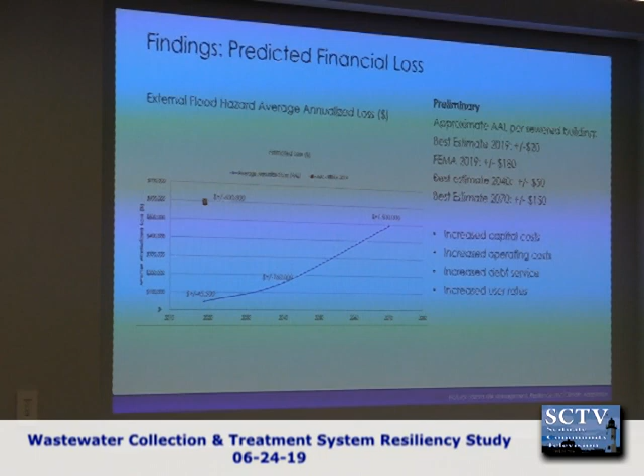And so I'm kind of starting with the last slide we ended with in the last presentation, which is trying to translate some of this into a financial loss. I talked about this quite a bit in the last presentation, so I don't want to do that again today. But we try and treat this in financial terms as much as we can. This doesn't have costs related to the effects of the infiltration, but does have costs related to the external flood vulnerabilities. So it just gives you kind of a metric, and those curves are going up.

The x-axis is time. And really what I want to say is there's uncertainty here, but we try, in our business, to predict these costs going forward. And then those costs ideally would get incorporated into how you look at your user fee, your rate structure, the town's general budget, the operating budget for the system.

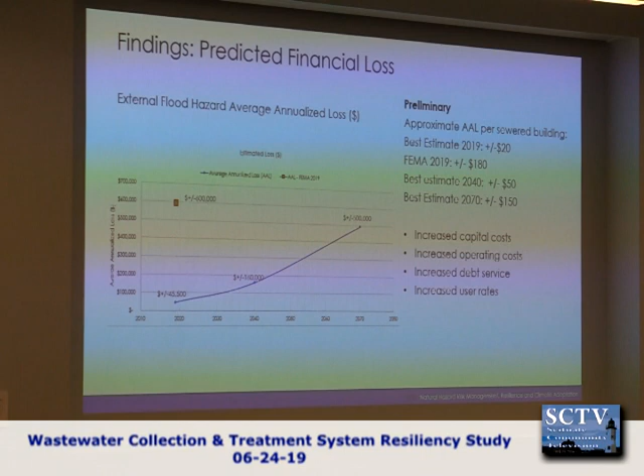So, when you think of costs for operating a wastewater system, maybe you have to replace some aging facility, you've got to buy chemicals, you've got labor costs, all of those. Well, these are additional costs to that. But they're very real costs. While they're not as well known, because we're predicting in the future, they're very real. We do know they will happen. They'll happen with fairly predictable average likelihood over time. So part of what we have to do is really try to get an understanding of that and integrate that into the overall finances of the town, but in particular the finances of the system.

So I'm going to go through these slides pretty quickly because they are a little bit detailed, but just kind of walk through the process. So once we did all that risk and hazard characterization, we looked at all the impacts of each of the pump stations and the impacts to the treatment plant, and we revisited the infiltration issue that was done by a company called CDM Smith. We start to set priorities, because we know doing nothing isn't really a reasonable priority. That's sort of the beginning of a diminished town, basically, is doing nothing.

So you really have to be somewhat proactive here, and so the first priority is dealing with 4 of these key drainage areas that are the primary sources of your infiltration and inflow. And we move down to looking at making some of the pump stations more flood resistant, hardening. We're doing the same with the treatment plant. And then we look at other options that we have in addition to that number 1, to kind of manage overflow. So, yeah, you may have a question.

Yeah, what does harden mean? Hardening could mean that if flood waters would rise to the point where they would get through the door and start impacting systems inside the pump station, we would put a watertight door. You would put a what? Like a watertight door. You wouldn't have to try to raise the station? Well, that is a form of hardening, but that is a very expensive form of hardening, because these pump stations are about $2 million a pop. So we are trying to be efficient in how to do that.

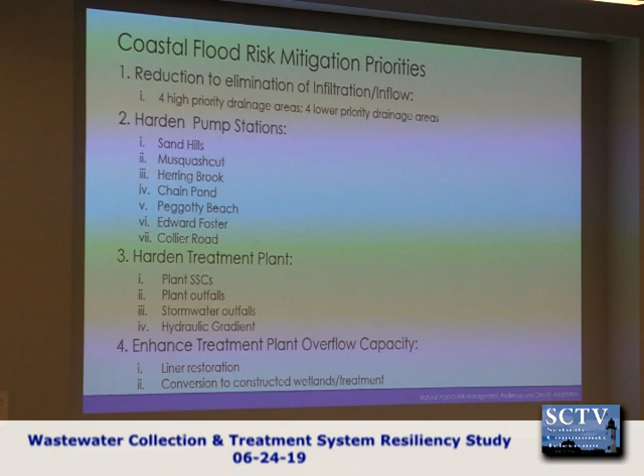So that's a good segue. Part of being efficient is to take a phased approach, because us presenting slides or even reports is completely pointless if it's not likely to be implemented. There are a lot of engineers who just throw numbers, but for this to be successful as a town, it has to be implemented. That's part of what we see as our job. So we realize you're not going to do it all at once, because that would just mean you would do nothing. So we take a phased approach, and actually I have the slides in front of me. I don't know if you can look at that.

So how do we look at phasing? Really the goal, it's basically near term and long term, and I'll talk about what that means in terms of years in a few minutes. But our immediate goal is to reduce the risk within a reasonable price point that can be done in a near term period, in a few years.

What does the abbreviation I/I mean? So that is infiltration and inflow. That's all that water coming into the system. And so how do you reduce that? Well, the town's consultant, CDM Smith, has laid out, there's a whole report on it, but you're really talking about things like replacing pipes, picking them up, replacing them.

You're talking about eliminating sources, which are often right at the house, maybe even on private property, that are putting water into that system. So if you have leaky pipes, you want to replace those, like the clay pipes. For example, if you had a roof leader from your roof drains hooked up to the sewer system, that's a source you would want to eliminate, right? But all those add up, and they add up to millions of gallons.

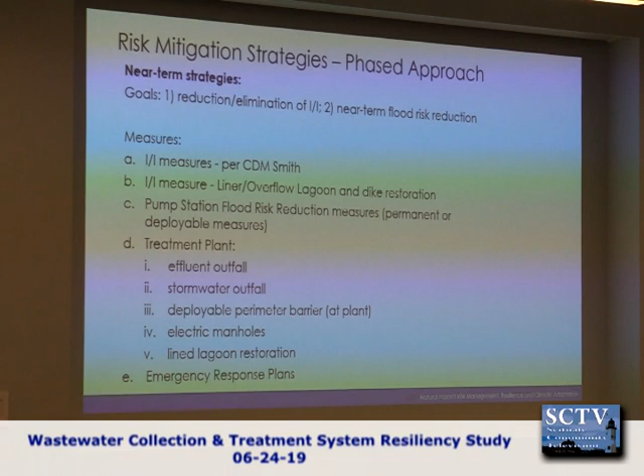That March event, if you look at your risk as a hockey stick, and that risk being the performance of your wastewater treatment system, was right at the cusp of the whole system collapsing. It was managed, not easily, but if you go a little worse, where you get several of those back to back, that's the point where the system's going to start to shut down, and you won't have use of the service. That's where we're at. So that's a real risk. You've experienced it, you've lived it. That's near term.

Then we have a separate set of strategies for long term. The long-term strategy is based on industry guidance for people in the business of designing wastewater treatment systems. That guidance now has specific standards relating to climate adaptation and flooding resilience. It's very effective if you build a brand new system from scratch, but we still try to achieve the intent of that guidance to the extent practical for existing systems. So that's obviously more money.

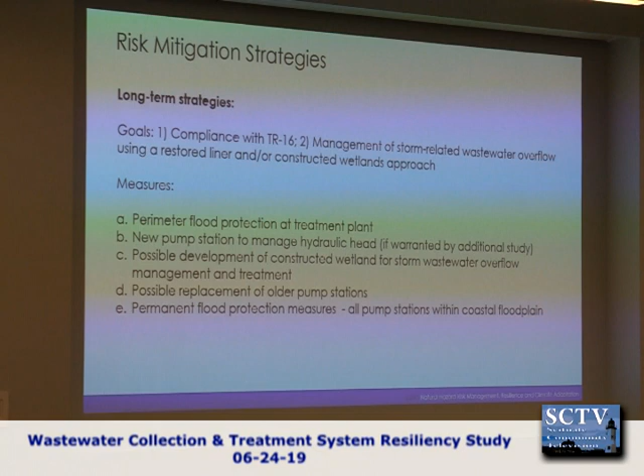So that's a longer-term strategy, but it is a key strategy going forward. The short-term strategy will reduce your risk in the near term, but if you want to extend the life of this whole facility for 35 to 50 additional years, it's going to be a long-term strategy, and a more expensive one. So, what are some of those? I'll just go through some of these measures.

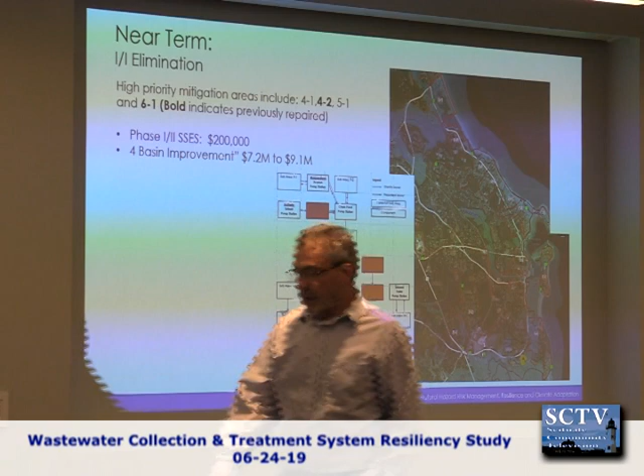So, for infiltration, there are 4 specific areas that are key. Those are the areas in red. These are the highest priority. I don't know street by street, but these are key areas right here. Those are high risk because they're contributing a very large proportion of the infiltration into the system. So they're affecting all the other users, even though they represent a small portion of the users.

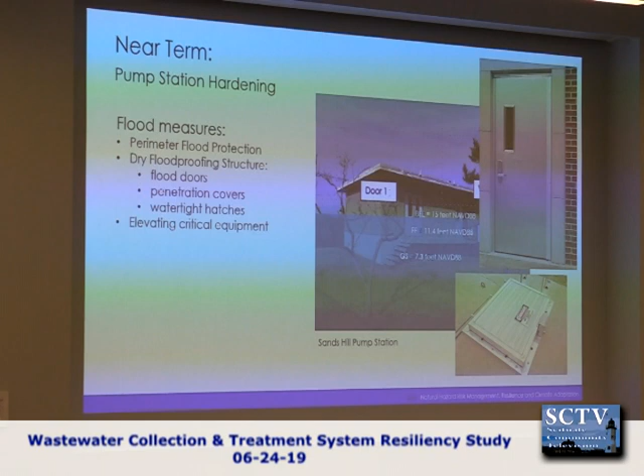You can see that's that. Could you go back to the picture? So where was the March storm? It was about 10, so it was right at that landing. It looked massive because there's water everywhere, right? They got to it in a rowboat to get into the building. But it had just started to reach the point where it would have started to go through the building and the vents, and you have a lot of other penetrations. So that was an issue.

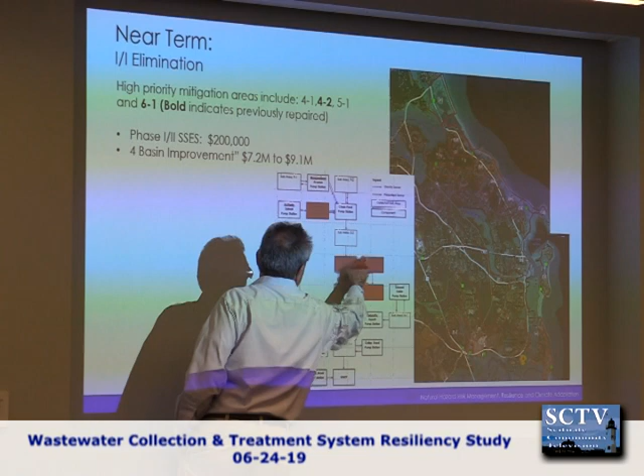If you look at this flow chart, I have different versions, but basically all of these go into that. So I'm just trying to think about, you know, this happened in March of last year where it was pretty close to getting in, and you're going to harden these structures so that they won't have this risk. But over time in the future, won't the water be higher more frequently? Is that a long-term strategy? Yeah, that's a lot of what we talked about in the last presentation, but no, it's a very valid question.

So you have a flood risk today, and that flood risk in our world we describe in terms of probability. So a 100-year recurrence event is a flood that has a 1 in 100 chance of being met or exceeded in any given year, right? Over a period of 30 years, you have about a 1 in 4 chance of meeting or exceeding that flood. So it's just a numbers thing. But when you have an increase in sea level, the 100-year recurrence interval flood today, in 10 years might be a 20-year, that much more frequent, right? So all those numbers start shifting, and your frequency of impacts and the costs associated with that start going up.

So in the near term, we just want to minimize the risk today, but we want to do it at a lower cost, like using deployable measures, not elevating a pump station for another $2 million. When we look at the long-term strategies, we're really trying to comply with those industry standards, which take sea level rise, project that out within reasonable estimations, and bring that into account in terms of the measures that are done in the long term, which are going to be more substantially expensive. Does that make sense? So, good question. The answer is yes. You have to account for the future.

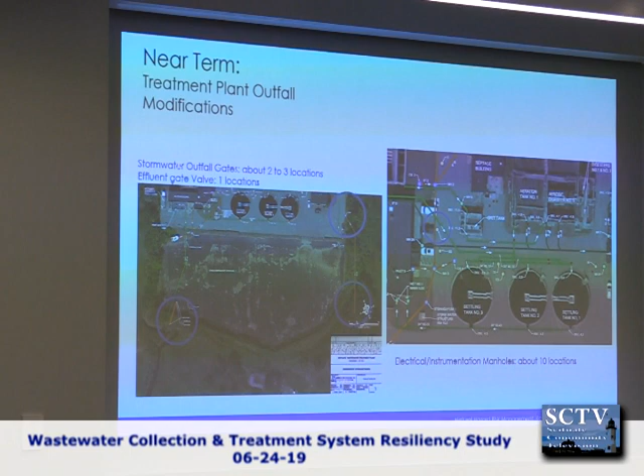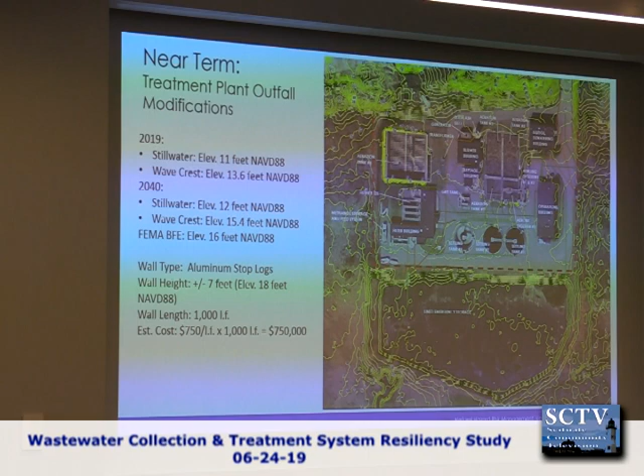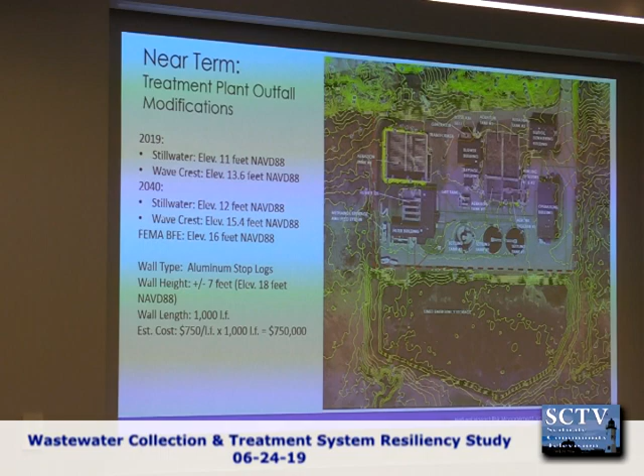But so basically, let's take this slide right here. So everything here is about elevation relative to flood elevation. So it's about the elevation of the ground surface. It's about the elevation of the equipment. It's about all of these things in a treatment plant. So when we go into that, we create a kind of discrete spreadsheet that identifies each of the major systems and components within that. And then we look at the elevations of each of those components, we understand how they operate, and then we try and assess their vulnerability.

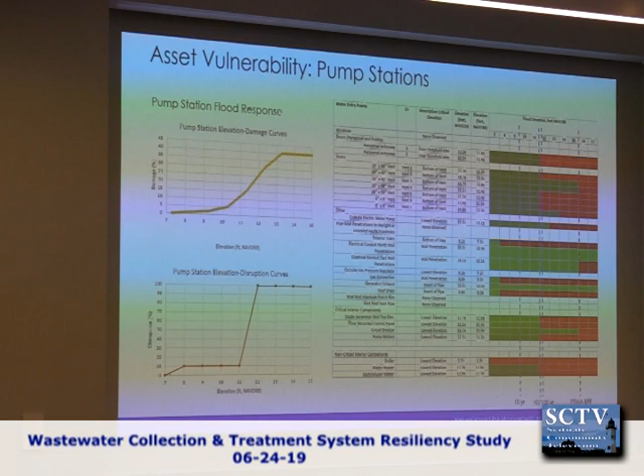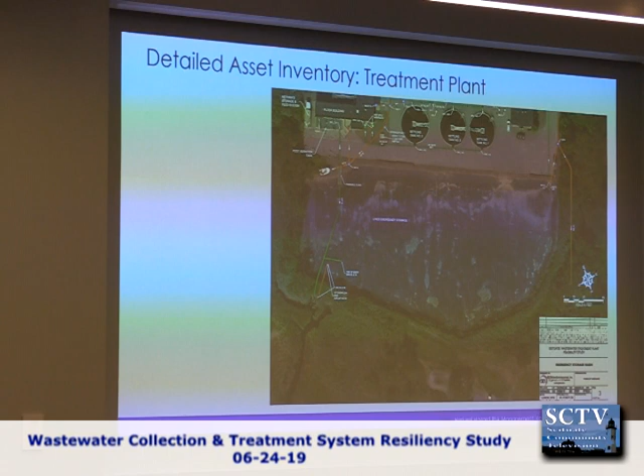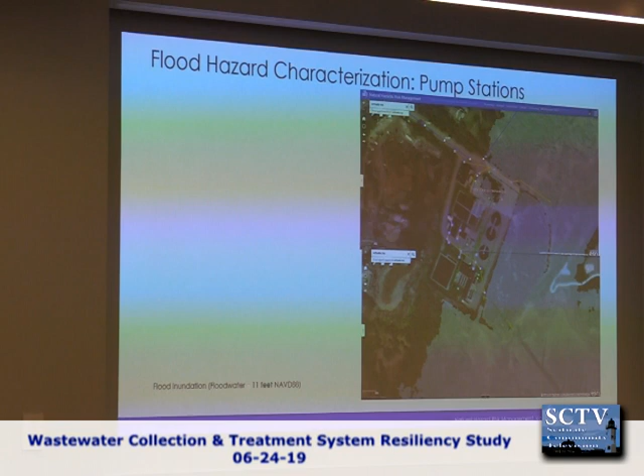Okay, so here's a pump station. This is just one pump station. We do the same thing for the treatment plant, and so we go through, we itemize and inventory all the components and systems. We understand how they operate, which ones will shut the system down, for example, versus which ones are not a big deal. And we look very closely at flood hazard. So part of that is to try and assess that flood hazard. So we don't just go to a FEMA map, we try and break it down into something a little more discrete than that. And this is just a summary table, but for the treatment plant itself, for each of these rows, we have a detailed table. I get it.

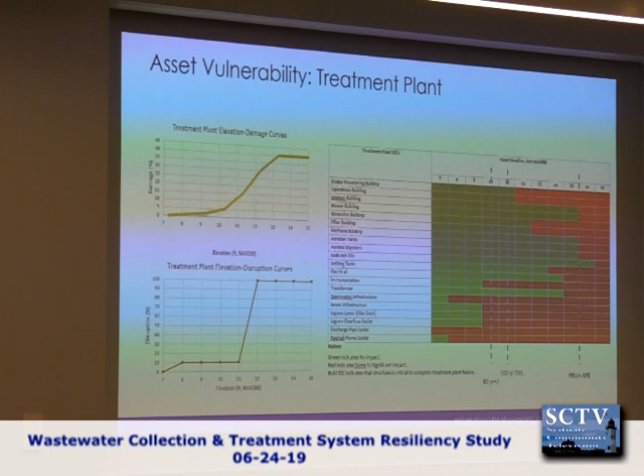So it's that kind of understanding the system, which is all these little pieces, understanding the vulnerability of the system. That's characterizing the flood hazard, and applying that hazard to the system. And then it's predicting the losses that come out of that. And then we annualize those losses. We take another step. This is from last week's presentation, but I showed you the details of the buildings, right? But all of those now play into a broader system, which is the collection and treatment system. So this is a conceptual model of that system, if you will.

So all of the houses, your houses fit into one of those boxes. And one of those boxes fits into a pump station. And this looks at how all of that's connected. So why Sand Hills is such a high priority system, like I pointed out, is all of that has to go through there to get to here. Even if that's not impacted, but this is shut down, unless the town spends a fortune and bypasses the system on an emergency basis, nothing from there is getting through. So that's the next level, to look at it at a very discrete component level, and then look at it at a system level. We do both of those.

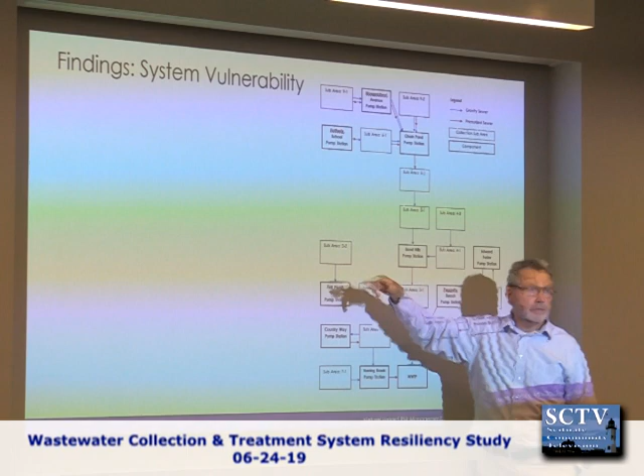We do it this way to try and prioritize. If you have X number of dollars in the near term, that's politically what can be done, then where do we spend it? Do we spend it here? Well, yeah, I guess the homeowners there would love that, right? But I just count the numbers and look at relative impacts. I'd say, no, we spend it in here, right? Because that's got the biggest bang for the buck, if you will. And then eventually we get to here. So that's the process of prioritization. Is that too little, too much?

I thought we were talking about the outfall and the treatment plant itself. Yeah, okay, well, this is the big picture, right? Okay, so now you're going to get into a little bit of the details here. I just wanted to hear what modifications you were thinking about here. Yeah, so these are near term, right? So I got a few things here that we're thinking about. Look at D there, right? So these are the lower hanging fruit. And there's some kind of funkiness.

Are you pretty familiar with this system? You sound like you might be. Yeah, I'm the director for the Watershed Association. Ah, perfect, okay. Were you here last time? No, one of my staff was.

Okay, great. So some of these are kind of straightforward, so you have stormwater outfalls in the estuary. Those don't have gates, so you can get backflow into the system itself if you get high water elevation. So that's kind of a one-by-one key issue. The effluent outfall is a bit of a separate issue, which I can show you in a picture, what we're thinking.

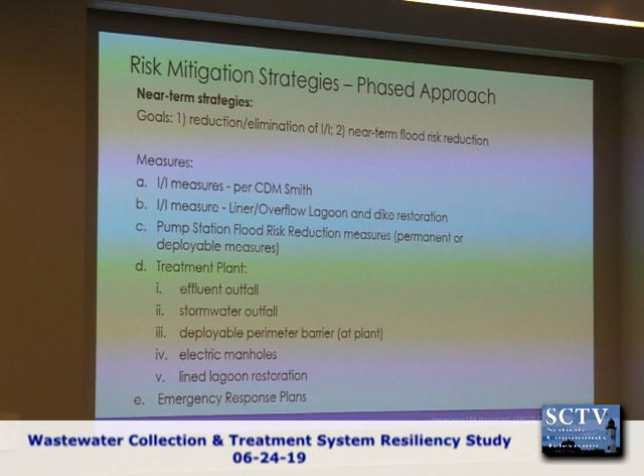But the big picture items here are a deployable perimeter barrier, which in the near term means a lower cost one, so a lower height one, and then also the use of the lined lagoon itself. So what that means is, right now, at least what we're pricing out, is a deployable system that would act as perimeter flood protection on the plant itself.

So it's not necessarily a longer-term system. It may become integrated into a longer-term system, but we don't have the operational capacity to install 1,000 feet with the staff prior to a flood coming, because we just don't have the manpower. So we would probably select a deployable system that's semi-permanent, like an aluminum stop-log system. They could set it up, it's not going to get UV degradation over time, but it's still flexible enough, like when they do snow plowing, they can take out whole sections because they push the snow out.

So is that the end-all flood protection for the plant in the long term? No, because it's probably not going to be high enough. It's not going to be substantial. But is it a short-term solution to having the settling tanks flooded, which will shut the system down? So it's kind of an iterative process, which I think from your background you would get immediately, but we have to go through the spreadsheets one by one to show you. But that's a concept. And the other big concept is this lagoon.

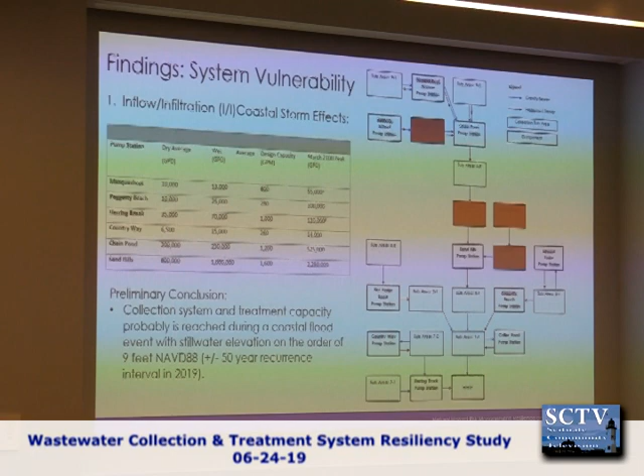So back to this lagoon system. This was originally constructed, I believe, as an overflow capacity system. Sorry, it sounds a little vague, but you can see this is one of our recommendations for additional study. Right now, within the plant itself, you have a hydraulic gradient that has to be met. You have a series of pumps that constantly control the heads in it. Those pumps and that gradient are dependent on what the elevation is right here. When that was upgraded or designed, it had to support a 100-year flood elevation. That was a 100-year flood elevation then.

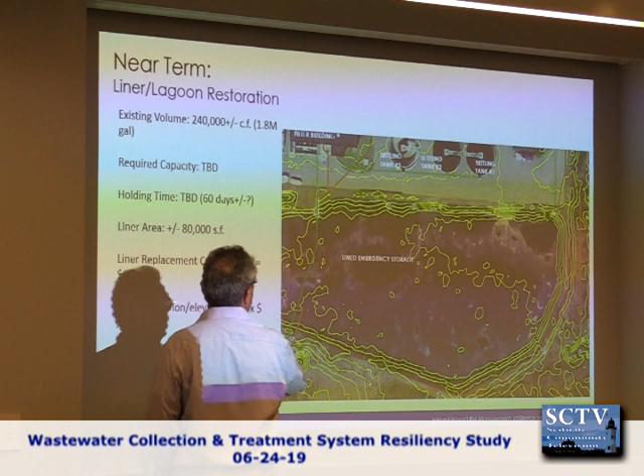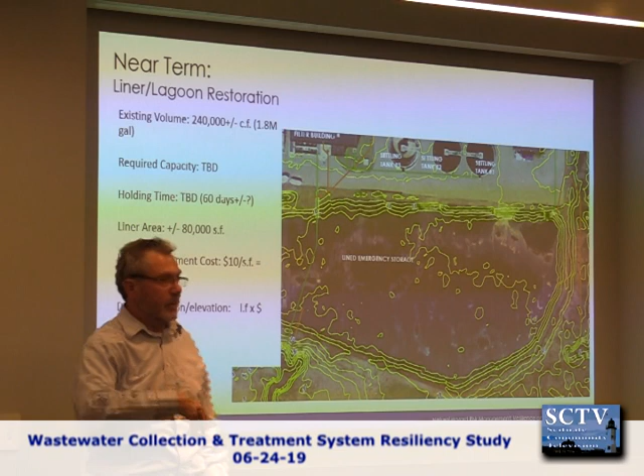So if that level goes up now, that starts to have an effect backing up to the capacity of the whole system. And right now, I haven't shown it on this plan, but there's a connector to the discharge here, a riser pipe, which would spill out into the lagoon. And then in the upper right-hand corner, that green line, you have the ability to bring that wastewater back into the system. So you could take the overflow and retreat it, so it doesn't get discharged without full treatment.

Right. Now, we have a little bit of an issue from a flooding perspective because the existing perimeter dike is at elevation 10. So that's one of our issues. We don't deal with it in the near term, which is just the next few years, but in the long term, we absolutely have to deal with that. There's no point restoring the lagoon if it just gets filled because it got overtopped. Do you know if this lagoon is being used now? No, and it's had a lot of UV damage. It probably needs replacement. That's what we're proposing.

So to make this functional, it all comes back to this issue of capacity. So when I show you some numbers for infiltration and inflow, you're going to be surprised how expensive it is to fix that.

And so part of this thinking, the thing is a little complicated. So we don't do this in a vacuum, by the way. We do this as sort of part of other consulting groups that are working on the plan. But let me just throw out a couple scenarios. You can't fix the infiltration and inflow to the extent we would like in a reasonably near term. Can we partially take care of that problem through putting some of the money into restoring this and actually making it work as an overflow? If that's cheaper, then not.

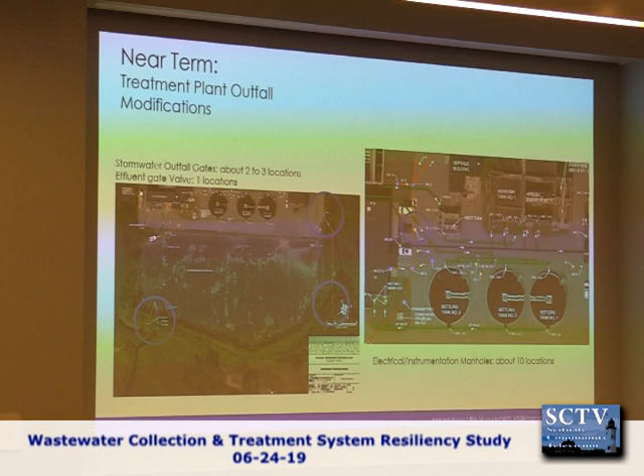Some of the piping issues, they're a little bit of a mashup. So we have some stormwater. We have an issue that we've sort of bundled in here, which is right now there's a lot of instrumentation and electrical that's underground, and it's got leaky manholes, but they're also really aging now, and they're a service problem as they are. So we've thrown those in here.

How long has this plant been in operation? Originally '66, I should know that off the top of my head. It's pretty old. It's over 50 years old. But there's been upgrades. There's been 2 major upgrades. The plant itself actually works pretty well. It's just got so much water coming into it that it's exceeding its capacity. So that's why that's a number one priority.

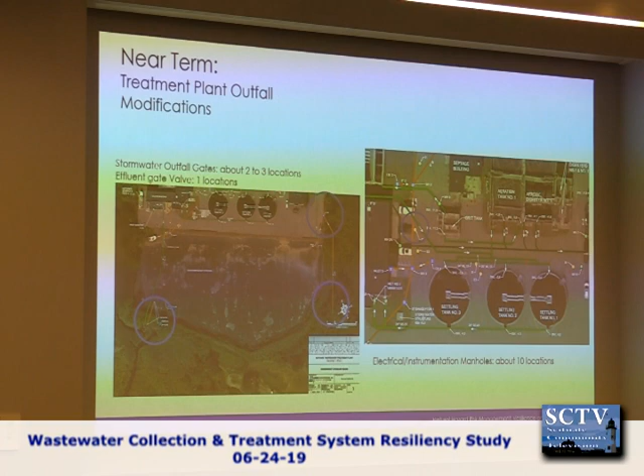And then we have a kind of funky situation with that pond down at the other end. So we have a stormwater line, that's the yellow line, that has a gate valve here. So it can't go out, but it can go in. So that's a minor thing, but that's got to be thought through. So that's sort of lower hanging fruit, but this is the bigger one, and the perimeter protection is a big item.

So there's 2 general approaches to overall long-term, near-term. You can deal with flood protection on a component and system basis. So we put all of these hundreds of systems within that plant to try and harden all the ones that we think are vulnerable. Or you can do perimeter flood protection. The majority of municipal wastewater treatment plants that I'm aware of in the Northeast that have a riverine or coastal flood hazard are dealing with it through perimeter flood protection. They're building levees or dikes, or flood walls. We can't really do that because we don't have the footprint, and we have some other issues. It's been the predominant approach.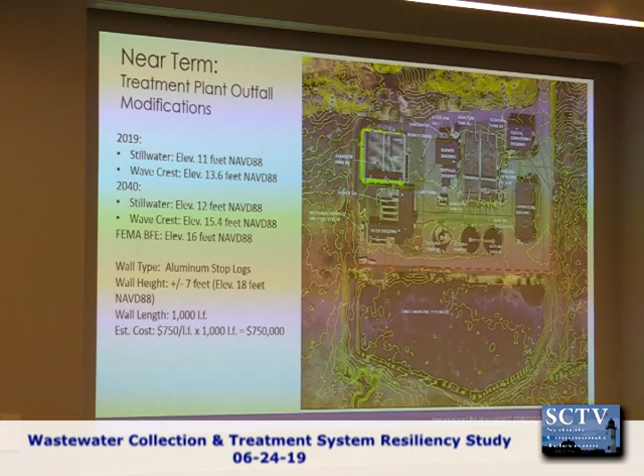Yes? Maybe just, I'm sure you come from this, but, so you're building walls around the edge of the treatment plant structures to keep the water from coming in from coastal flooding, but you're building a lined storage area outside of this that you'll discharge partially treated or untreated sewage to, and then the flood waters will inundate that, and then they'll come into the river. Is that the plan? Yeah, and it's good to be a little skeptical.

So part of this cost is to do some modification to the dike, but you're asking questions that have detailed answers. So part of this is the dike itself is not geotechnically suitable to just increase it 6 feet tomorrow. The dike I'm talking about is this low perimeter berm that surrounds the marsh and the lagoon. It's man-made, around elevation 10. Okay, so you can imagine the flood there was pretty close to 10 in March.

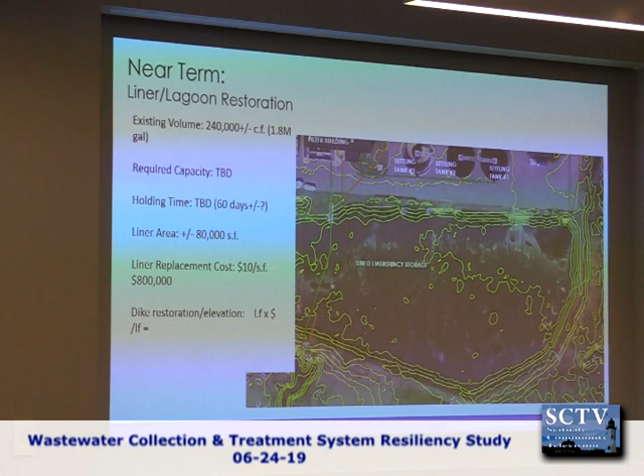So right now, if that exceeded and flooded the lagoon, it probably still wouldn't shut the plant down because the plant's higher. So we're up around 11 to 12 here, and then when we actually get to the system components, we have another few feet. So the plant's vulnerable in terms of the impacts, but elevation-wise, it's not as vulnerable as the lagoon. So if we repaired the lagoon now, we would probably try and get some improvement on the dike to get another foot or so out of it, but that just becomes a cost analysis.

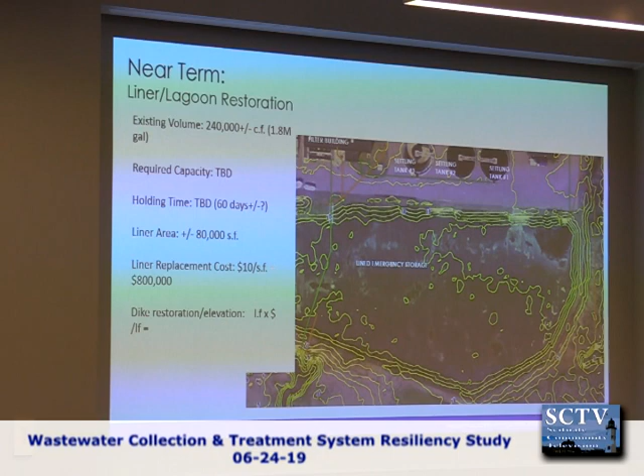Okay, I'm just still trying to understand. If we're having a storm, water's coming into the pipes from the sand hills and from the other areas, and at the same time, we're having some coastal flooding here, and yet you have to release water somewhere, and that's what this storage is supposed to be, but yet it's potentially underwater. Yeah, because it's not a binary. In the near term, we're trying to reduce risk. We're not trying to reduce all risk. We're trying to reduce some risk.

So if we were to increase that elevation to 11 on that dike, and that turns out to be feasible from a cost perspective, our ability to use it as an overflow capacity system is only as good as it not being overtopped. Obviously, because then we have it under controlled release, right? So if we have a 10-year flood or a 50-year flood, where we still have a large infiltration and inflow, for those occurrences, you could still utilize it for that.

So there's a management component to this. The system is not a passive system. It's not a passive system today. The operator has to go meter down, well, not every one of them, but several of those pumps in the pump station to meter the flow down. And he's effectively using the entire system itself, the pipes, as a storage unit to do it. So there's a lot of active management. This is just another element to that.

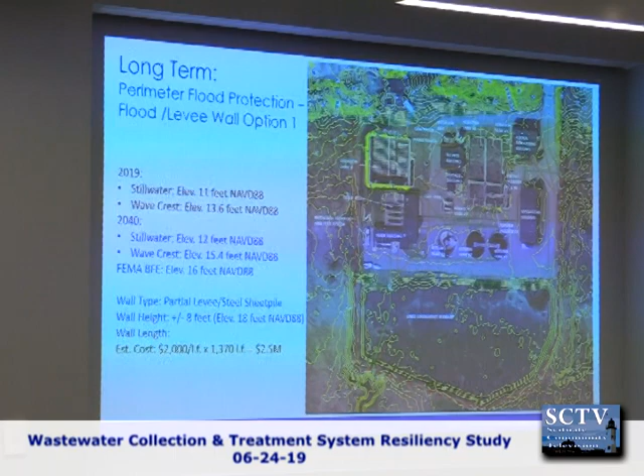But if you were to look long-term, and you still want to continue with this option of having an overflow system, then you'd probably be looking at a much more aggressive perimeter flood protection system, which I think is addressing your concern, which is if we exceed that elevation 10 or 11, now we're going to have a system that protects somewhere up to like 18. So the whole system is protected in its entirety.

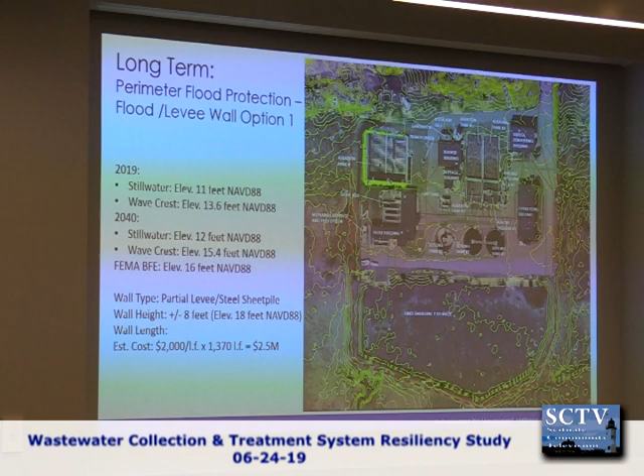I'll read the report. The first question I have is what's the differential between the cost of I&I to this? Yeah. Because you're putting the risk on the river rather than... Yeah, and that differential shifts with the overall capacity. So the capacity is a very dynamic thing. So right now, if you had no new users, we have a pretty good idea what the infiltration and inflow is, and we know what the normal use is, right? So that's in CDM Smith's report. And then you just come up with a number and you try and support that number.

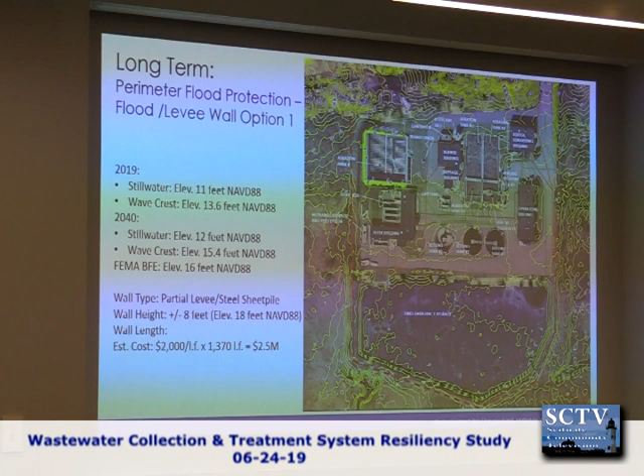If the infiltration and inflow number gets reduced, then the capacity of your system goes up proportionally. That dynamic shifts a little bit when you start adding new users. You really can't add new users unless you create capacity. You can create capacity by reducing your infiltration and inflow, or you can create capacity by building a new plant, or a substantial increase in capacity plant, and then you get all that permanent.

So the overarching concept here, beyond damage, and maybe I should have mentioned it right from the get-go, obviously part of the losses are unintended, untreated releases. So that's a loss. It's not as easy a loss for us to environmentally and financially assess, but it's still a loss. The permit's only going to support so many of those.

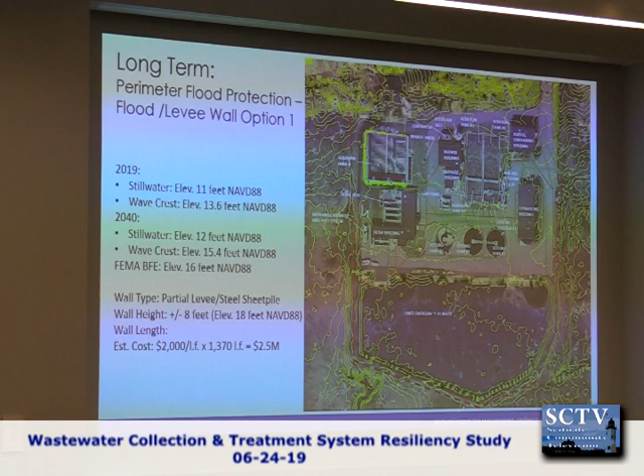So this long-term solution would raise the elevation of what you called the dike, now it's a levee? Yeah, but we couldn't do it with the levee, because we're right up against it, and there are a number of things we want to watch for. So usually these are, kind of think of like a chain link fence, right? That gives you kind of a frame of the height and dimensions. Typically this would most likely be like a steel sheet pile.

May I ask a question about the current treatment plant that you're suggesting these improvements to? How much more capacity does that treatment plant have? Because we're building all these multi-unit buildings. Yeah, I'm probably not the best person to answer that question because that's been a different analysis. But

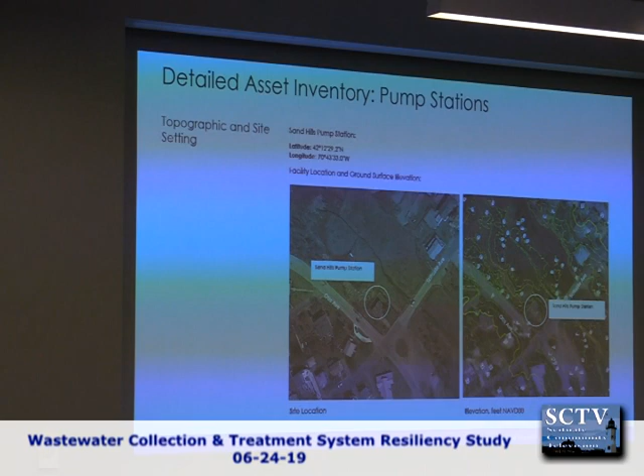I can tell you the more immediate issue is probably close to zero because it's being driven by not the normal use. You do have excess capacity, and it's being driven by this condition right here, the yellow block there, this guy. Right. Your peak. And our best estimate was that was like a 30 to 50 year recurrence if you look at it today.

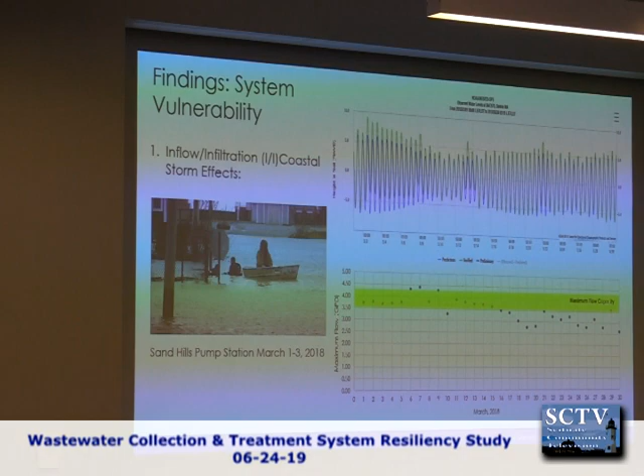So maybe. But the additional buildings and access to the sewer system, the whole system with new buildings and new homes, is only going to make that situation worse. But you deal with your I&I. I don't know these numbers off the top of my head yet, but I think I might have it on.

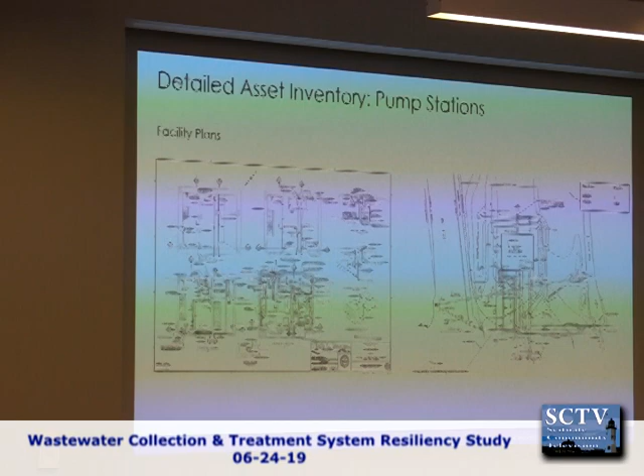So we want to have a wastewater treatment plant to treat sewage. We don't want to have a wastewater treatment plant treating ocean water. So about 25 to 30%, and that's an estimate, it could be either end of that figure, we're treating stuff that we don't want to be, whether it's rainwater or seawater.

So for projects like the few that you just mentioned, the town applied for and received the MassWorks infrastructure grant to do the I&I work, to replace the sewer pipes out at Cedar Point. They're doing an additional study, but the hope is that we can get those pipes replaced. They're some of the oldest services.

It goes down to a 50-year-old vitrified clay pipe that's probably underwater on a daily basis, and then when you have these flood events, that's even worse. That same type of construction methodology goes up and down the coast, Oceanside and other areas. So all of those areas are sucking in a considerable amount of water.

And yes, when we fix those, we want to expand to areas that we've already said sewers are coming your way. We have existing residents that we promised to provide connections to. And then, for example, the transit-oriented development down at Greenbush, those are the kinds of projects the town wants to see, and that's actually the project the town leveraged to get the money to do Cedar Point. To have that kind of smart growth in the right places, that's the trade-off.

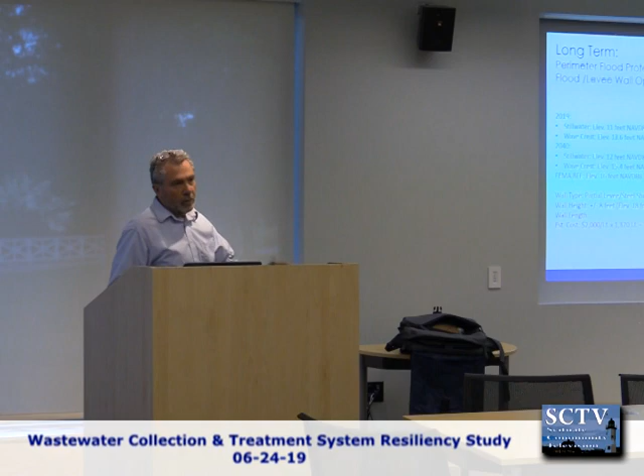Yeah, your shortest path to increasing the number of users is to deal with the I&I, because that frees up a lot of capacity without building or investing in new treatment. Once that's done, right here, you fix that, you're down here, so you have a lot of excess capacity. And with new users, eventually you're going to get back there, but then it's different.

Brad, is it possible to get a 30% reduction in I&I? Is 100% what your aim is? Anything's possible with money. Well, yeah, right, like building an 18-foot wall along the river. That's the goal of Cedar Point, that type of project. A sealed system is typically better in terms of not allowing I&I in the future.

So to do an I&I removal project in Cedar Point and all the basins that were identified in the CDM Smith report, I don't know if we'll always get everything. I think that will get the majority of the identified leaks in our system out. We can address those 4 or 5 priority areas.

Is there an industry standard for a percent I&I in the system, just like they have in water? Yeah, pipes are never going to be 100%. Well, I don't know if it's publicly available, but CDM Smith's report gives a pretty decent breakdown. There's a lot of low-hanging fruit there that can be dealt with. The industry standard, I think I had it. Is it like 10% like it is for water? No, it's not written quite like that. It's very broad. I got it here.

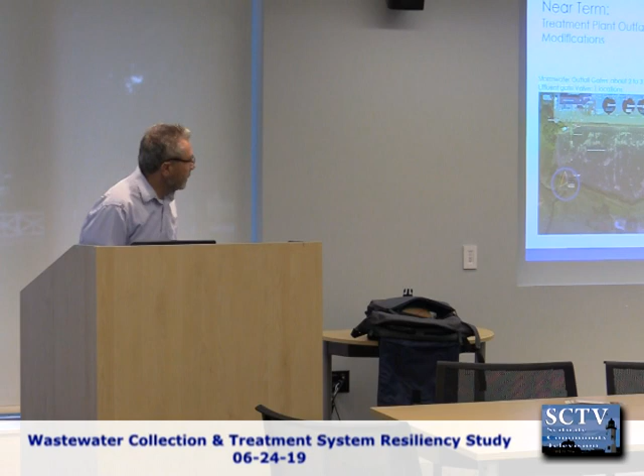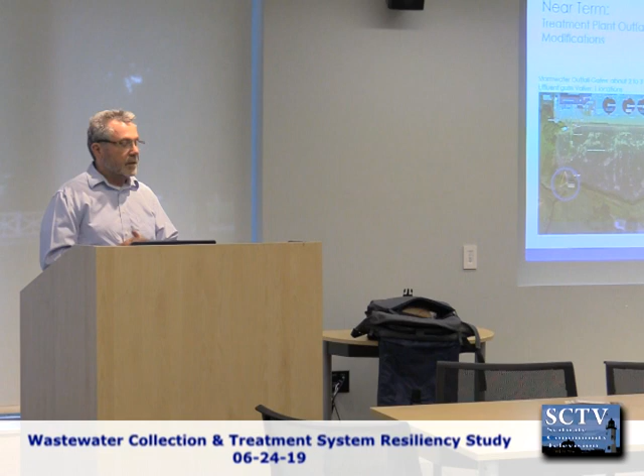We're involved with Stratford, Connecticut, looking at expanding a perimeter flood protection levee, probably by using a sheet pile flood wall into what's already an existing levee. So the reason we're seeing so many of those is because there are not a lot of other choices. We can alternatively try and protect every system, like settlement tanks. We can reconstruct higher walls around those tanks, but you're going to quickly surpass a practical price point, because at the end of the day this is going to be funded by the users, and that's the reality.

So what we try and do is, if we do something like this, we try and do it as aesthetically pleasing as we can, and as practically as we can. But you just start to run out of options after a while without building a new system in its entirety. We're obviously not replacing the entire treatment and collection system, so are we elevating this plant 8 feet? Not likely. That would just be an extraordinary cost.

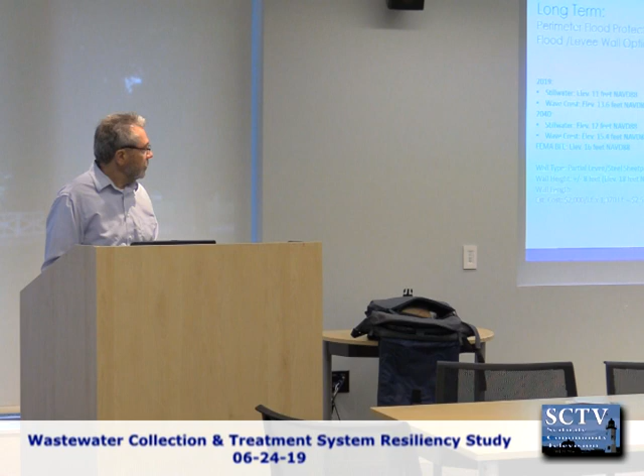You'd have to shut the system down and reconstruct it. You might do that for a pump station, but you're not going to do it for an entire treatment plant. So we've got what we've got, and we go from there. But the good news is this is not by any means the worst we've seen. They put effort into designing for a 100-year flood historically. So some of these are much more flood prone than this.

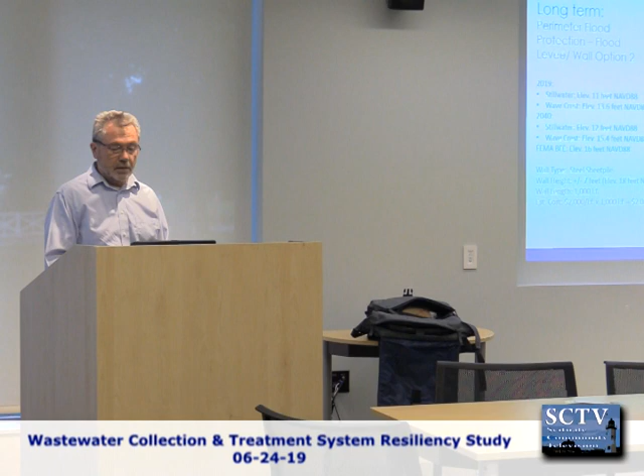So then, this is a minor detail, but this is linked into that hydraulic gradient, which is linked into the overflow of the lagoon. We may need to increase our hydraulic gradient capacity. We can do that with an additional pump.

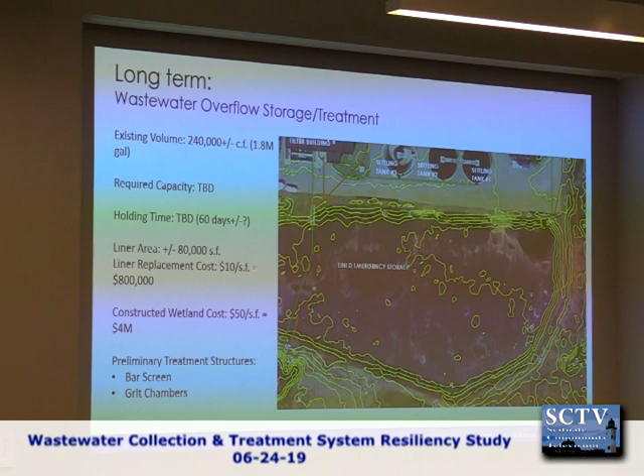And one concept we're looking at, but this is long-term, we were asked to at least bring it in, because I'm actually kind of intrigued by it personally, but we don't have a large volume here. The basic idea is, if you're going to have an overflow system, can that overflow system act as a constructed wetland to get that kind of secondary treatment? And so we see a range of these. This is the basic concept.

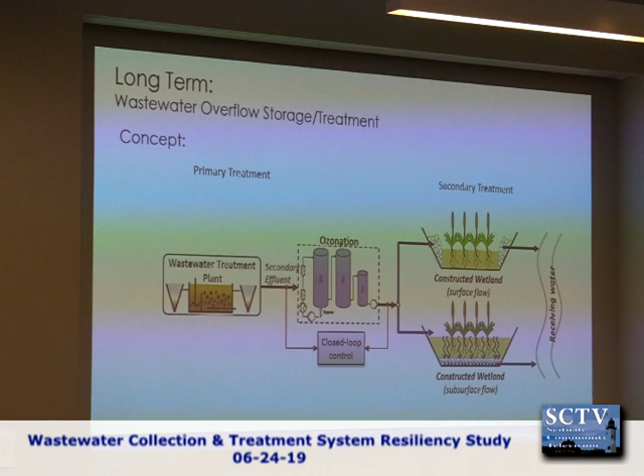So if you ignore the left part of this, which is your treatment plant, just look at the right part of this. You still have a lined facility, but you create a wetland system within that lined facility, and that wetland system would be used to get secondary treatment prior to discharge, and you still have the opportunity to bring some of that back into the system the way it's set up now.

So there are some good examples of that, and I think this is something we're going to see more of. This is a site in North Carolina that has actually created the entire treatment system around this approach, so it's actually untreated effluent going into the system.

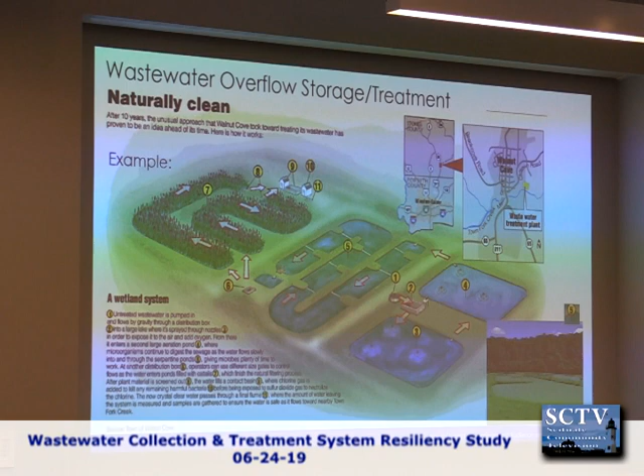But we're really that green field at the top. That's what we're talking about. So we don't have a lot of capacity in that lagoon, so we have some versions of this that actually channelize natural estuaries and utilize those sort of cordoned off components of a natural estuary as part of the treatment. So there are some options, but we kind of see that as the long term.

We have another week or so on this. We're trying to refine some of these numbers, but I wanted to show you some numbers just so you can get a general feeling about what this is. So about 75 to 80% of these costs are really the infiltration and inflow issue. So that's that top line, and that's phased into 2 phases. The first phase are those 4 high priority areas, and additional areas identified by C.M. Smith. These are the costs associated with those areas.

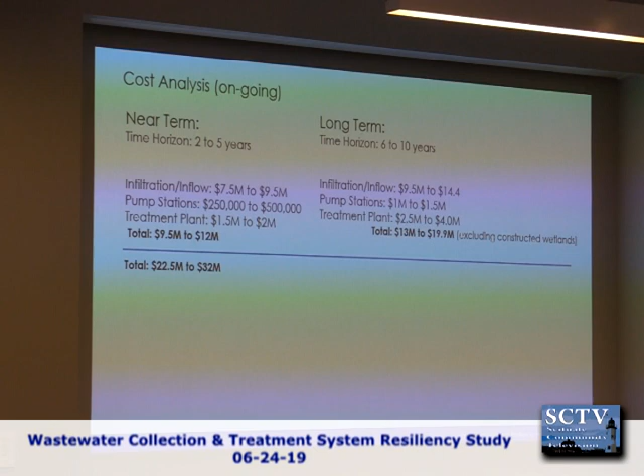And then the other things that I've talked to you about go into those other rows, and you end up with a general cost of about 22.5 to 32 million that has to be brought into both your operating and your overall system costs. That goes to operating, not construction? Yeah, so I'm going to get to that in 1 second. So I'm winding down here.

So there are some additional studies that we strongly recommend. The first two of these are fairly straightforward since they've already been done. But one of the things about our resilience practice, or anybody's resilience, we don't want to do this in a vacuum. It's only going to be successful if we integrate it into what's already going on. So you've already done this infiltration study. We didn't feel like it fully captured some of the coastal flood, so we want to see those numbers adjusted. It's not going to be that hard with the input we've developed here; it'll revise those infiltration and inflow estimates to better account for some of the coastal flood component.

You've done a detailed study relative to rate increase for your wastewater system, which is a good thing to do. But we would want to make sure that within that analysis, we start to include some of these climate adaptation resilience costs going forward, so those can really be well understood in terms of relating the cost into a rate structure. Plant hydraulic gradient, I talked a little bit about that. That's kind of a standalone study.

Pump station replacement benefit cost, I think you asked a question along those lines. We have two candidates. I kept it here as a placeholder, but I kind of think, even though they're old, there's been a lot invested in them, and we're probably more likely going to try and keep them and work around. The ones that are in your vulnerable areas are relatively new. Yeah, except for Sand Hills. It's a 66 plant. Okay. But I think it's had a lot of improvements.

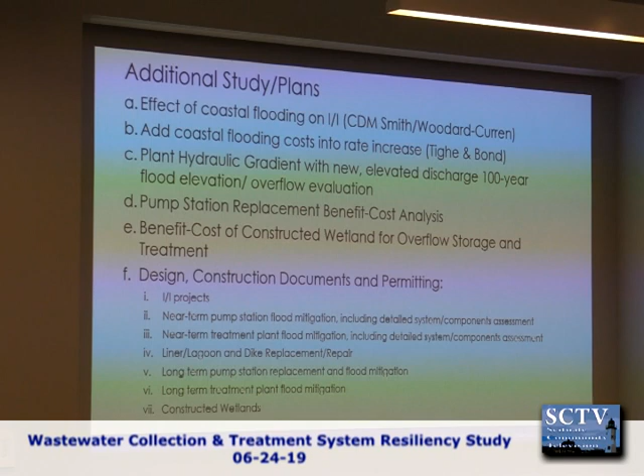And so, a very long-term objective is to take a closer look at this constructed wetland issue, because I do think it's practical, it's a feel-good. It's certainly not a near-term risk reduction, but it's passed the first test that it is practical enough that it is worthy of looking at more closely. And then all this has to go to packages of design, construction plans, and permitting. So this is really what it's about. All this comes out of this slide here, and that is implementation.

These are really socioeconomic challenges. They're not engineering challenges so much. That's part of what they are, but not necessarily the most difficult part. The difficult part is really the political implementation, and the political implementation is really a process of developing consensus.

In this case, within the town, we really should have dedicated planning groups that have representation of the citizenry, representation of the town professionals, like Brad, and they have very clear objectives, and they meet regularly. And they become the intermediary group with the Board of Selectmen. It's the Board of Selectmen that starts the process, along with, in certain cases, town votes, for actually implementing actionable changes.

So putting that political implementation is really, in our experience, the hard part of doing this. Brad and I were talking earlier about the communities that can thrive in a changing climate environment, particularly with coastal flooding issues. They are going to be the communities that can get their planning and fiscal house under control, so you're not spending money in a reactionary case. You can do it in a more planned phase.

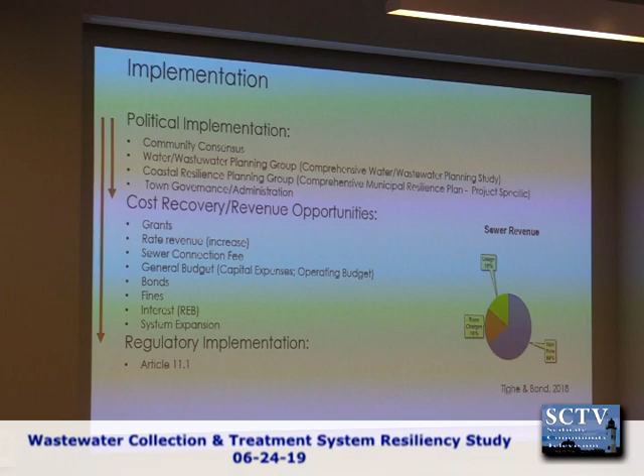I understand that. Are there climate adaptation funds being discussed at the state or federal level? Yeah, Sam's going to talk about that. That's really the grants, but the basic point I wanted to get across is it's set up financially as a user-funded system, which means the money coming in should pay for the costs going out. That's the way it's traditionally done for water and wastewater.

In the climate adaptation world that we're in, we see this user-based concept being expanded to non-typical things like stormwater. So we see communities starting to institute taxes or use fees tied to stormwater runoff going into the street. You're not using that stormwater, but you're creating it. So it's really intended to put a cost to that to change behavior, like I'm going to invest in porous pavement for my driveway so I don't have to pay that cost. That's the way it works.

So here are your opportunities. Grants, which is what you were asking about. Right now there are primarily state grants. Sam will talk about those in detail. The funding in Massachusetts within those grant programs is not adequate today to cover the actual costs associated with these types of risks in all the communities in Massachusetts. So absolutely go after it. Why not? It's there. It's trying to distribute the cost to all the taxpayers of Massachusetts, and you can be the recipient of that. But you're not going to solve all your problems counting on that.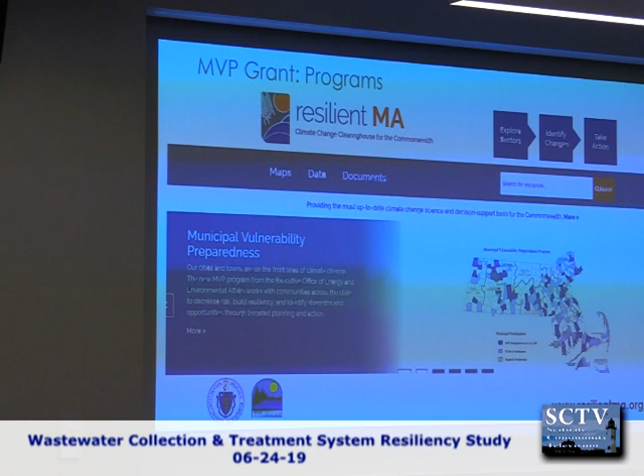So, Sam, why don't you just close this out and I'll take your final questions with these grant programs. Okay. So again, this is the Municipal Vulnerability Preparedness Program. It's a recently promulgated program in Massachusetts that is designed to fund communities that are certified by the Executive Office of Energy and Environmental Affairs. As Dan noted, this isn't going to solve all of the problems in Scituate or all of the communities combined.

The Executive Order 569 that brought about this program, Governor Baker sets aside about $2.4 billion over 10 years. You can see that right here. About $500 million will be set aside for climate change. To give you some perspective, Scituate was one of the first communities to be certified. And when we were working with Brad and Will a couple years ago to really go after this, there were maybe 8 communities that were certified at that time, I think, right, Brad? Mm-hmm. Today, there's well over 100, and there's 351 communities throughout Massachusetts.

This isn't just focused on coastal communities, because let's face it, there's other issues that can be impacted by climate change, such as drought, those type of factors, extreme heat. But we just want to give you some perspective that it's going to become increasingly competitive. This past grant cycle, there were $26 million in applicants, and the state had $10.1 million. But that's not to stop this program from being a key avenue for going after improvements to pump stations and other aspects of the system.

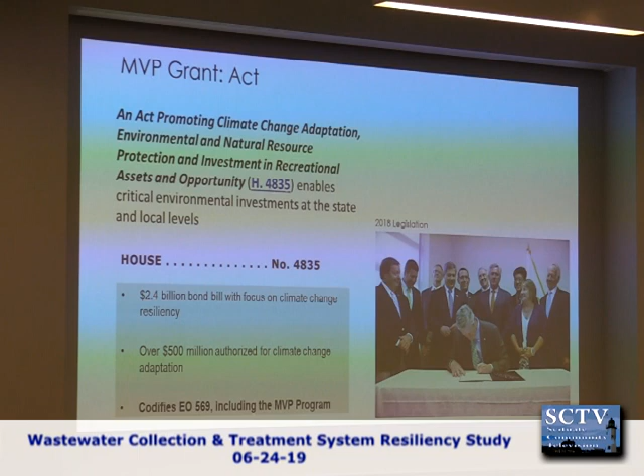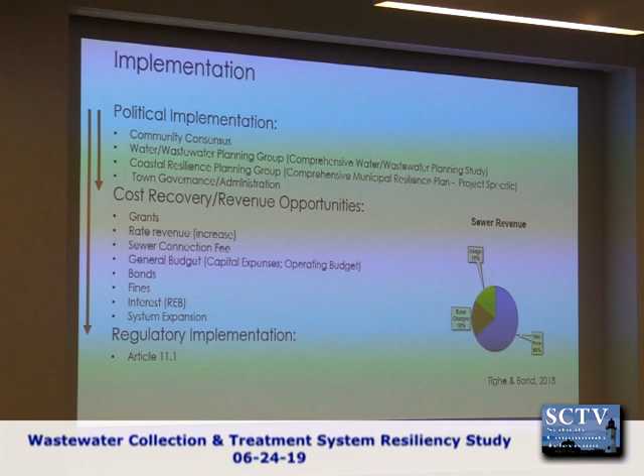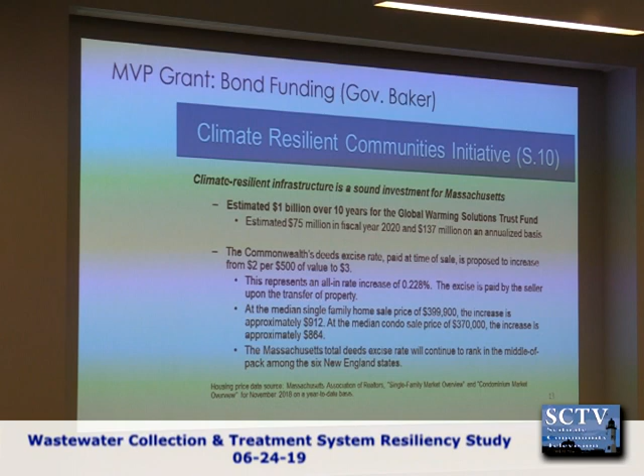The point is, you're going to have to take advantage of several of the other items that Dan noted, as far as bonds, rate increases, etc. But we just wanted to give you a flavor of the Massachusetts program because it's so new, and pretty much all of the measures that we've identified are going to be eligible within that program. Speaker DeLeo has also set aside $1 billion focused on climate adaptation, so that bumps it up to 3.4 total. But all of that money doesn't technically go towards grants. There's also several set-asides that are integrated for improvements throughout Massachusetts.

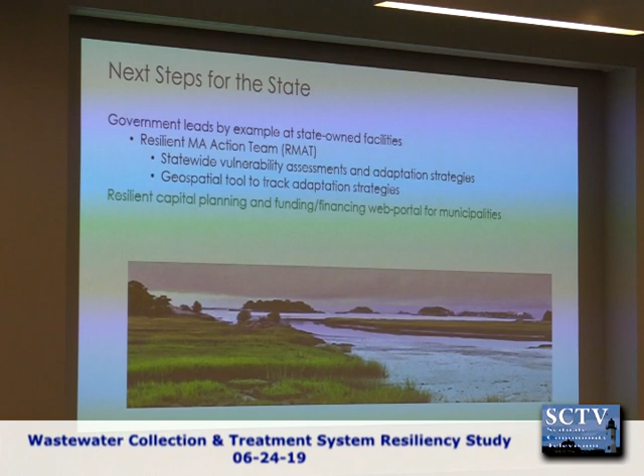And then to take it home, this Resilient Massachusetts Action Team, they've really developed a statewide vulnerability assessment. Well, this piece right here. So really, this is the key piece: the state was the first in the United States to create a natural hazard mitigation and climate adaptation plan in 2018 that was approved. There was a Resilient Massachusetts Action Team that is responsible for using a geospatial tool to help communities have a better understanding of available grants and identify funding opportunities in the future that can really make communities more resilient. It's also about bringing resilience into the state-owned properties.

So there are some federal programs too that have been around for a while, but they are applicable to wastewater treatment. So you obviously want to take advantage of every grant opportunity that you can, and we wouldn't discourage you from writing those applications. But you can't count on that as being your solution. I think it really can serve as your catalyst though; today, without this grant, this study would not have been possible. So it really serves as setting up your future priorities for going after different actions. And the larger the dollar amount, probably the less likely some of these grants will be available, because they have certain funding limits, up to $2 million.

So some of the larger expenditure items, and we help communities try to find avenues to use bonds and those types of financial mechanisms to make those improvements in the long term. Yeah, so what we got tonight and a few weeks ago in the first meeting was kind of the tip of the iceberg. There's a 250-page report that goes into a lot of detail. And I think, again, this process was enabled by that grant program.

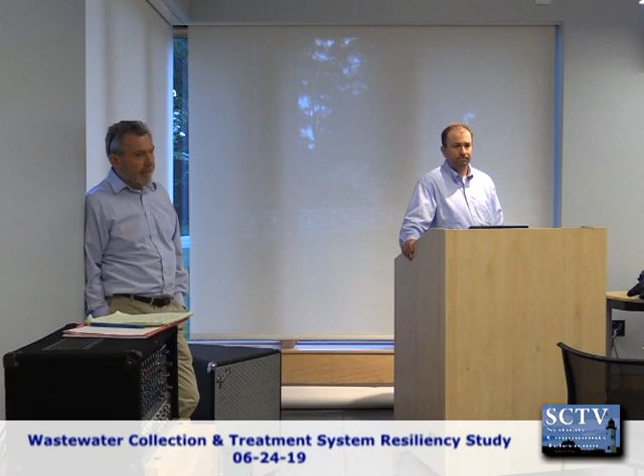Well, thank you for doing the presentation tonight. Yeah, thank you. The report, when it's available, and both presentations will be on the Planning and Development website in the town. And we will work to schedule a time, again, to do a summary presentation to the selectmen.